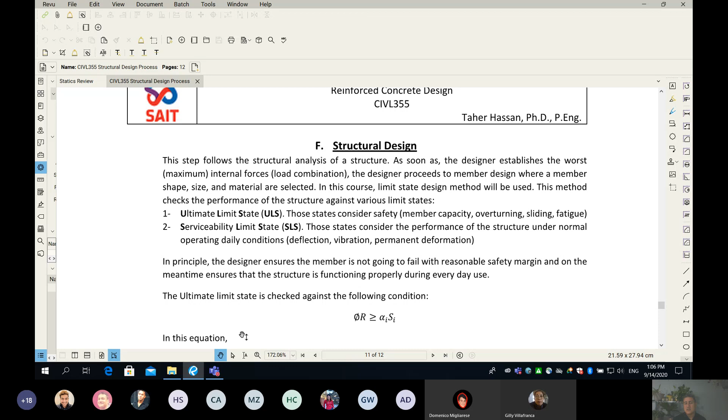Now, I think where we stopped last class is we looked at this equation. So I'm going to draw a box around this equation. It is not really an equation where you directly substitute in, but it's kind of a conceptual equation, which as soon as I start, you will see it will completely make sense to you guys.

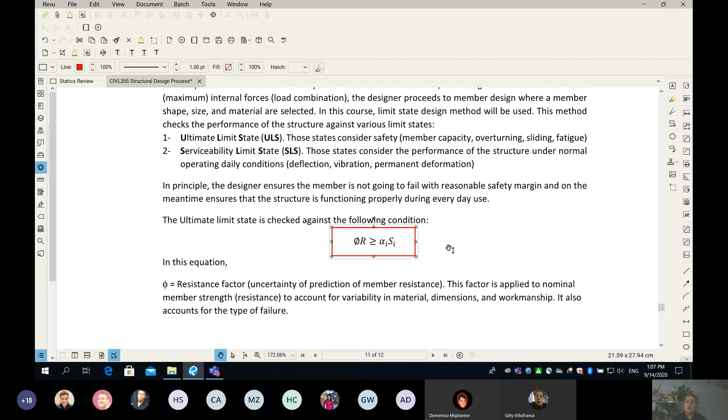Now, let me introduce two terminologies. Number one, R. You see in this equation capital R on the left side, and R is very simple. R is the resistance of the member, and I can say also the capacity of the member. In plain English, how much this member can take until it fails. Okay? Now, on the other side, there is something called S. And S is simply the internal forces that are coming from the load affecting the structure.

Okay? So if I write the equation here for you guys, I'm going to write the R one more time. So this is the capacity of the member. I'm going to write here another time. I'm going to say here S is the internal forces due to the acting loads.

So let me ask you one question, which you will see is supposed to be a very simple question. For my structure to be safe and not collapse under the acting loads, what should be the relationship between the capacity of the member and the internal forces from the load? Would you say it has to be larger, or it has to be equal, or it has to be smaller?

I need you guys to turn on your mic if you can, and all you have to say is: the resistance should be more than the internal forces, or the resistance should be equal to the internal forces from the loads, or finally the resistance should be less than the internal forces from the load. The resistance should be more than the internal forces. The resistance should be less than the SI. The resistance should be more.

Yeah, the resistance should be more. Guys, it's not a fight, okay? Cool down, please. No fight here, please. Okay. Yeah, the resistance should be more than SI. Thank you so much. We're in agreement right now.

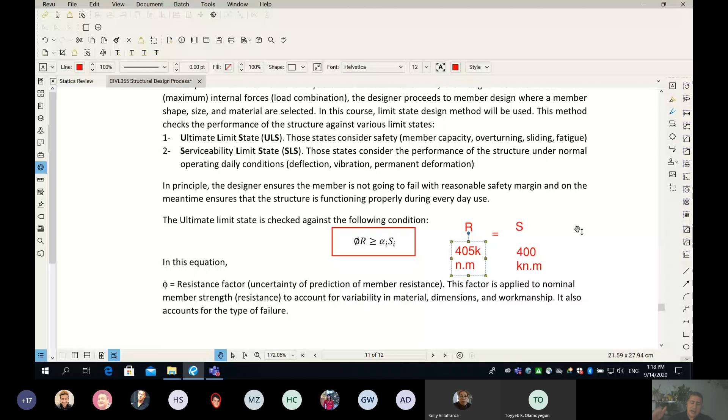Yes, on the paper, we can say my concrete is 30, and we can do all the mathematics and all the analysis, but who exactly guarantees that we're going to get on site our 30 MPa? So this phi is simply something that we have to, not a choice, we have to consider to make ourselves safe.

Now, I have a question for you, and this one is for a mark, okay? So guys, this is for 1% of your next assignment. I'm going to say the question, and again, I'm not going to make it random. You have to raise your hand, and then I'm going to let you guys speak out. So please, as soon as you know the answer, raise your hand. I will look back at MS Teams and see who raised by order.

Now, when you think about this resistance factor, this number, it should be more than 1, or it should be less than 1, and why? So the question is, the resistance factor phi should be more than 1 or should be less than 1, and why? Let's go to MS Teams and see.

Okay, great. Let's go with Gilly, who is on the top. I don't know if this is the same order that it was happening, but I have no other way to know the order. And again, guys, don't be so concerned. There are plenty of marks, I assure you will get some. So let's start with Gilly. What do you think? Is it going to be more than 1, less than 1, and why?

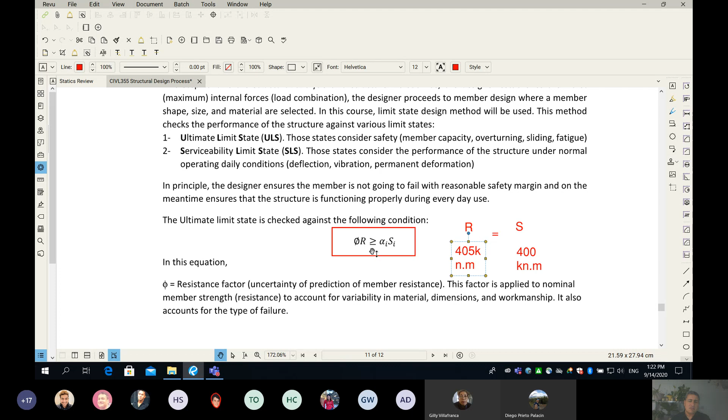Before we move on, let me look at my screen here. So guys, remember, in our class, it's not one material. With Corwin, it's only one material. With me, there are two materials to design your beam or your column: there is concrete and there is reinforcing bars. And that's why those numbers are different.

Hopefully you guys appreciate that we must treat two different materials. We cannot make the resistance factor for concrete the same as rebar. And the reason is very simple. Concrete is not really a homogeneous material; it consists of gravel, sand, water, cement. There are so many things that can go sideways.

You guys remember that from last year. However, rebar or steel is a more homogeneous material. Whenever we have a homogeneous material and the mechanical properties of this material are very consistent, in this case we can use a bigger number in terms of resistance factor, and you can see phi sub s, which is for reinforcing bar, is going to be 85%. And for concrete it is going to be 65%.

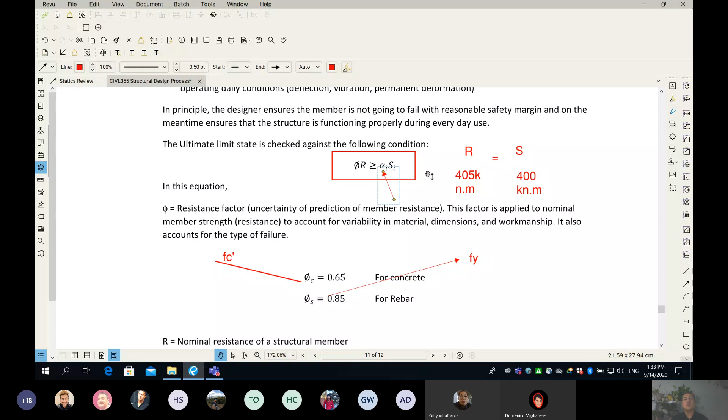Now, when you think about this magnification factor alpha, in the last class we talked about that our loads are not from the same type, because we have dead load, live load, snow load, wind load, and so on. Because those loads have different nature, every single load has its own load factor. So we are not going to multiply the dead load by the same factor that we're going to use with the live load, and so on. Now, who exactly defines those load combinations? Sorry, I kind of jumped a little bit, but let me go back, guys.

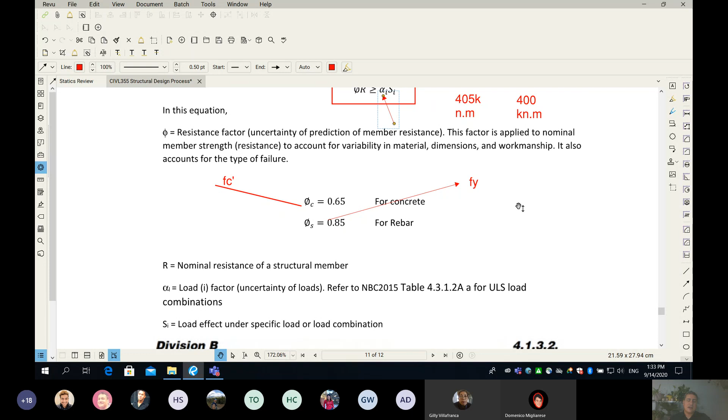When I say structure, it can be anything. It can be a warehouse. So in general, when we have a structure affected by loads, my question for you is, if we agree that the loads are dead load, live load, snow load, wind load, and so on, do you think those loads will act individually on the structure, or will they act together at the same time? Will the dead load act by itself at some time, then the live load at another time, the wind at another, or the snow at another? What do you think?

Please answer. Individually. They would act together. Together. Sometimes individually, or sometimes all at the same time. When there's a snow load, the dead load will also act at the same time, and the live load. Thank you, Jerry, so much. Okay, guys, look at this, please. That's true. Look at the dead load. Dead load, from the name, it doesn't go anywhere.

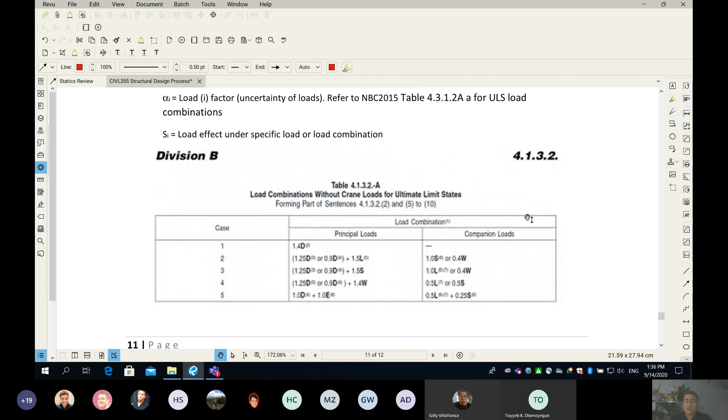The answer is here. Let's look at this table. The resolution is not great, but I'm not going to go really into details, because this is another deep discussion later on in my class. For now, what you see here is a table that comes from the National Building Code of 2019, or the Alberta Building Code of 2019, or the National Building Code of 2015. I'm going to go only through the first and second ones. The first one is called case number 1.

In this case, we need to study how our structure would behave and what the internal forces are due to 1.4D, which means the dead load multiplied by 1 plus 40% extra. If I ask you, in load case number 1, where is the alpha? Where is the load factor? Anybody turn on the mic and tell me? What is the load factor in load combination number 1? Here is load combo number 1. How much is my alpha? 1.4. Thank you so much.

So in this case, when we apply dead load by itself on the structure, we need to use the dead load multiplied by 1.4. It means 40% extra of the dead load. Now, in load combination number 2, things get a little more complicated, because load case number 1 is only dead load, nothing else affecting our structure. Load combination number 2 is a little bit more complicated.

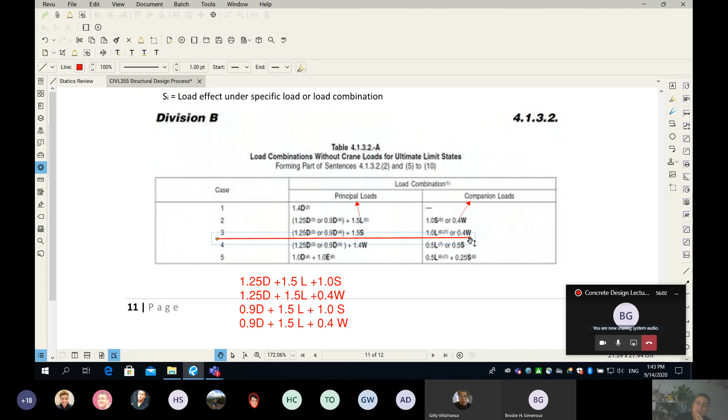Rudy. It looked like there was wind. No, your sound is not really great. Wind? In load combination number 3, wind is what? Sorry, 3. That would be a companion. In 3, it's snow. Exactly, you can see where I'm pointing right now. The snow is the principal load, and the companion load could be the live load or the wind load. Correct? Okay. Rudy got one mark.

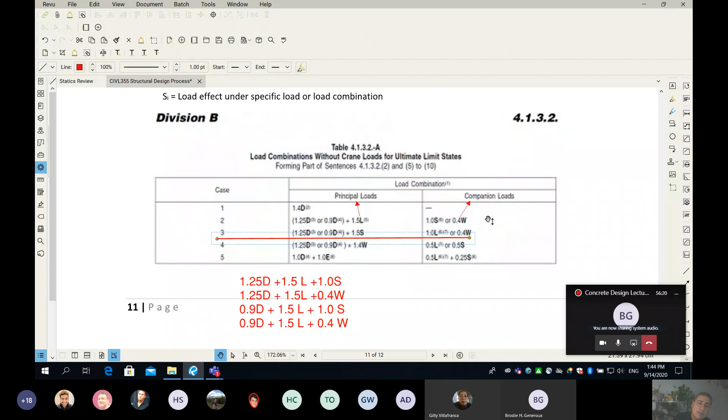Now, again, if you don't get it, trust me, we will go through this table every time we do a design, so please don't be concerned. Now, a few things to remember for this course before we finish this presentation and have a break. For the units, for the entire course we're going to use metric international units, which means for forces, the shear force or the axial force, we're going to use kilonewton, and we always say kN. Or we use meganewton, which is 1 million newtons, because mega is 1 million and kilo is 1,000.

For uniform or linear load, like the uniform load on beams, we use kilonewton per meter. For area load, for example for slabs, we use kilonewton per meter square, because that's a load per unit area, which is kPa or kilopascal. 1 kilonewton per meter square is simply 1 kPa. For stresses, we use newton per millimeter square, force per unit area, which is equal to MPa, megapascal. You're probably perfect at this, because you've done this last year in your concrete class, or maybe strength of materials.

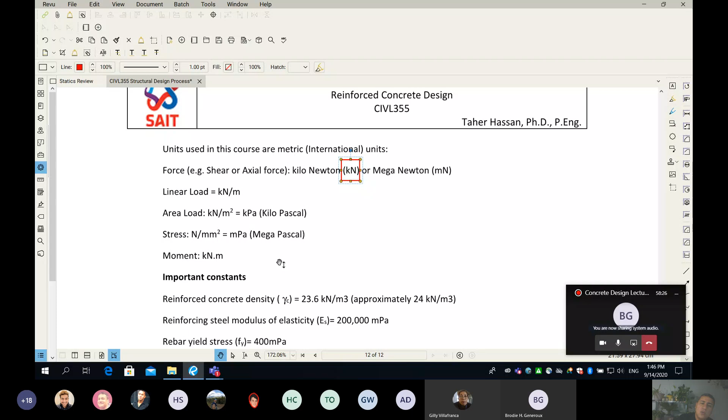And finally, the bending moment. The units will be force times lever arm, which is a distance, so kilonewton meter. Those are the units we're going to use in our class this year.

3 numbers, very important, that you guys will need to remember. And again, I will make you professional. You will just memorize them by heart. 3 numbers, very important in my course. The density, concrete density, which we refer as gamma C, gamma sub C. So this will be 23.6, and it's a force per volume, which means kilonewton per cubic meter.

And you know, I know that this number is kind of very difficult to memorize, so I make your life easy. We always instead use 24. So 24 is a very easy number to remember. Kilonewton per cubic meter. So every cubic meter of concrete will weigh 24 kilonewton. Okay.

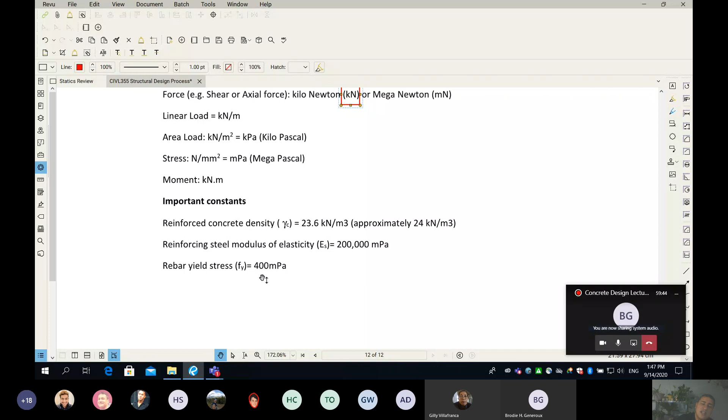Next is the modulus of elasticity, or Young's modulus, if you will. So modulus of elasticity is called E sub S, and this is for reinforcing rebar. So this is 200 gigapascal or 200,000 megapascal. And then finally, the rebar yield stress, which we call F sub Y. This is going to be 400 MPa.

Guys, now before the break, let's see questions. I got one. Back to that chart that you were showing, the principal loads and the comparison loads. Yes. Sorry, companion loads. How would this? Sorry, this might be a really stupid question. How would you? No, sir. Please don't say that. No stupid questions. Go ahead and say.

So when would you decide which principal load to choose when you're designing? Fantastic question. You know what? This is a smart question. So our friend, your name, sir, please? Dominic. So Dominic is asking, you know, I'm a designer. I'm designing a beam.

So should I, for example, use 1.4D, or should I use, you can see number 2 already yields 4. So you can think about 2 as 4 different load cases. And you can see 3 will do another 4. And 4 will give you another 4. And 5, there is no or, which means 5 is 1. So 1 is one load combination. 5 is one load combination. However, number 2, number 3 and number 4 will each yield 4 combinations.

Now, here is the answer. Let me ask you, and probably you yourself will answer this question. So you are designing a structure. Should you design the structure for one specific case, and if the other case happens, and unfortunately the other case gets you into more than what you anticipated, what's going to happen to your structure?

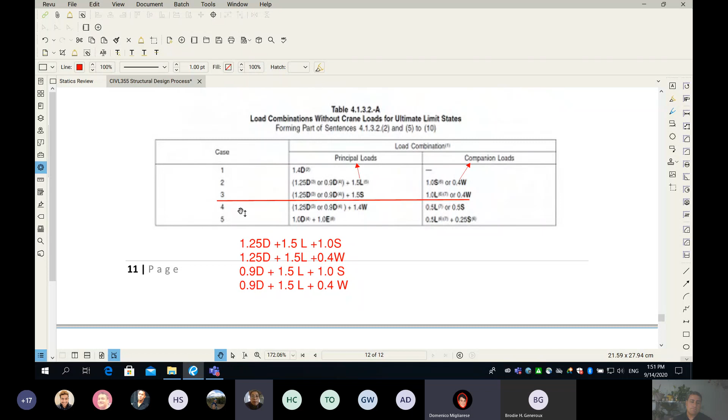It's a must. Otherwise, if you only focus on one load combination and ignore the other, and then in real life the other load combination happens, and unfortunately this load combination that you never even considered yields a moment more than what you designed for, then you go to jail, okay? Because it's gonna fail and probably kill somebody. All right, did I answer you? Thank you. Okay, perfect, guys.

It's 1:51. We're going to break for 10 minutes. I will see you here at 2:02. Okay, 2:02. I'm just wondering, is the other presentation